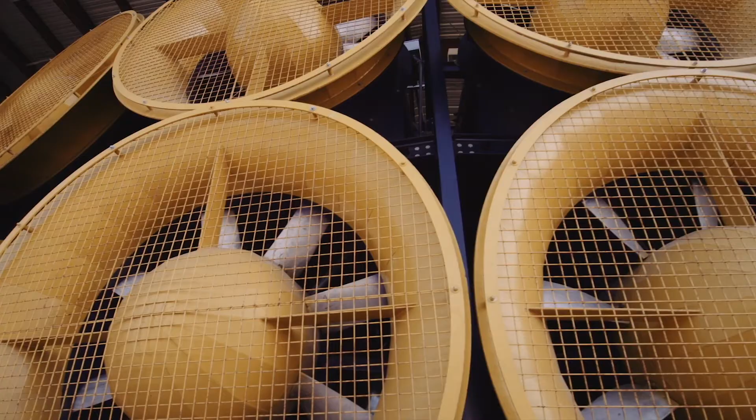The NHERI WOW experimental facility is powered by a combined 12-fan system capable of repeatable testing and up to 157 mile-per-hour wind speeds.

One advantage of the facility is the multi-scale and high Reynolds number simulation using 12 fans and a water spray system, which demonstrates the effects of wind and wind-driven rain.

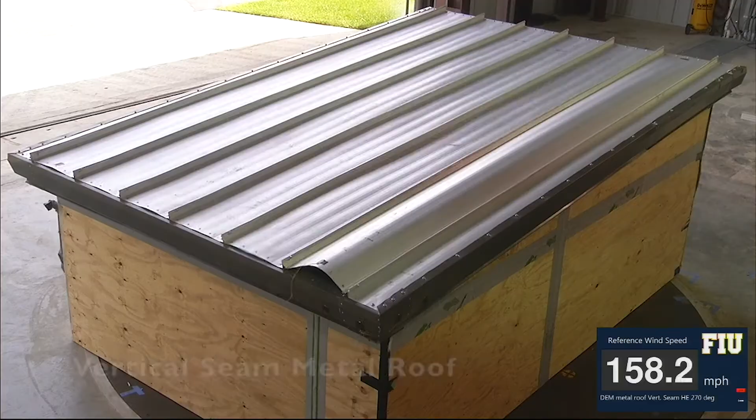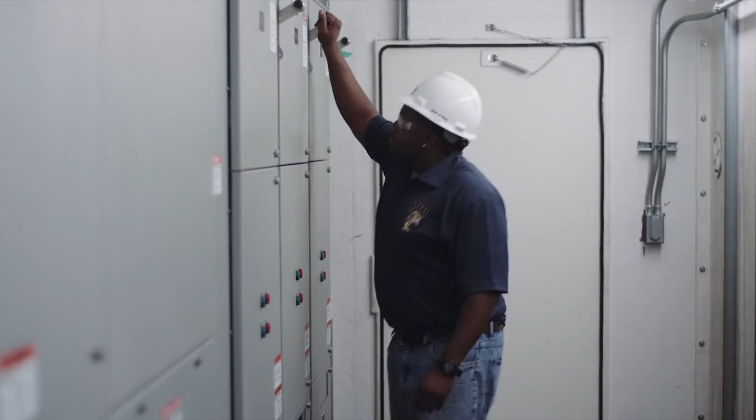The 16,000 square foot fenced-off secure area enables researchers to plan and perform destructive tests for up to Category 5 hurricane wind speeds. Using a wide range of equipment, instrumentation, and experimental simulation protocols, the distinguished group of faculty, staff, and the well-trained team of technical and operations personnel are ready to support your world-class research.

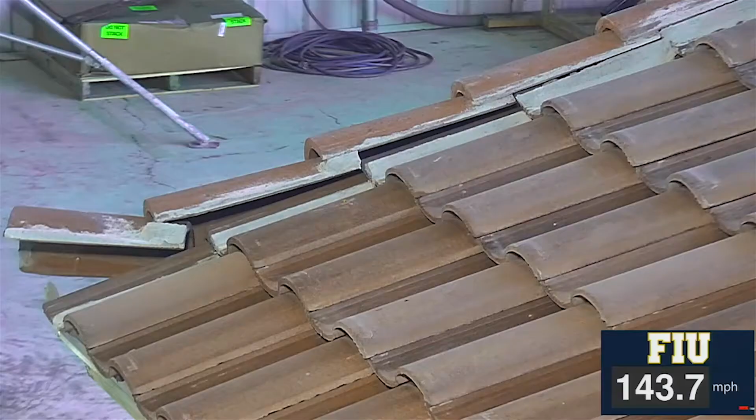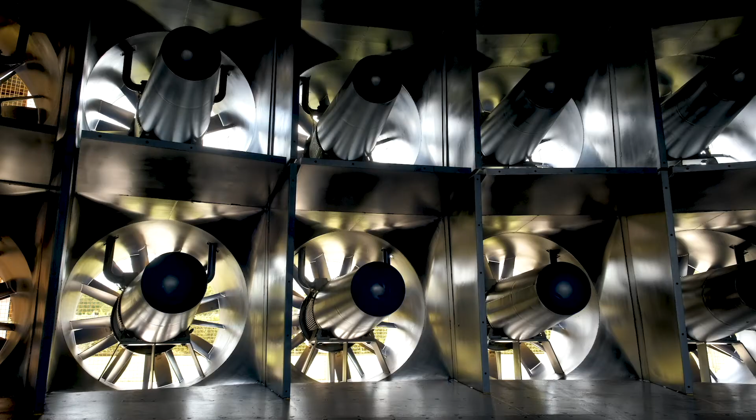The Wall of Wind offers the following testing: high-speed holistic testing with simulated wind speeds, including Category 5 hurricane, destructive tests to study failure modes, wind-driven rain simulation to study water intrusion, full and large-scale aerodynamic aeroelastic testing and atmospheric boundary layer flows, extreme environment testing to develop innovative mitigation devices, and conventional boundary layer wind tunnel testing.

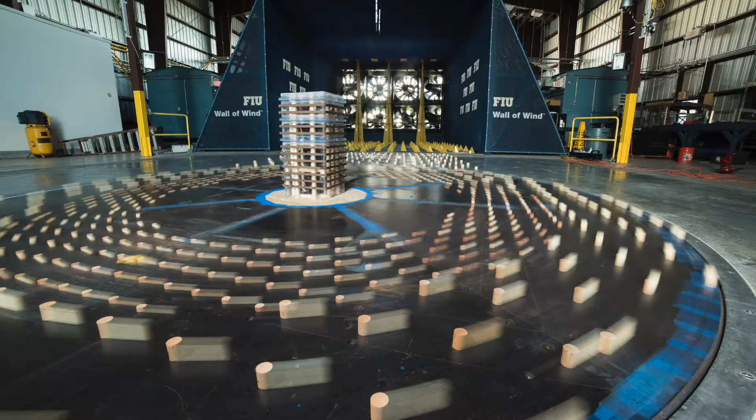If you are interested in learning more about the resources at the NHERI FIU Wall of Wind Experimental Facility and how they can support your research, contact Arindam Chowdhury.

Next, we have the Advanced Technology for Large Structural Systems Engineering Research Center at Lehigh University. Dr. Liang Cao will be here to answer your questions during our breakout sessions.

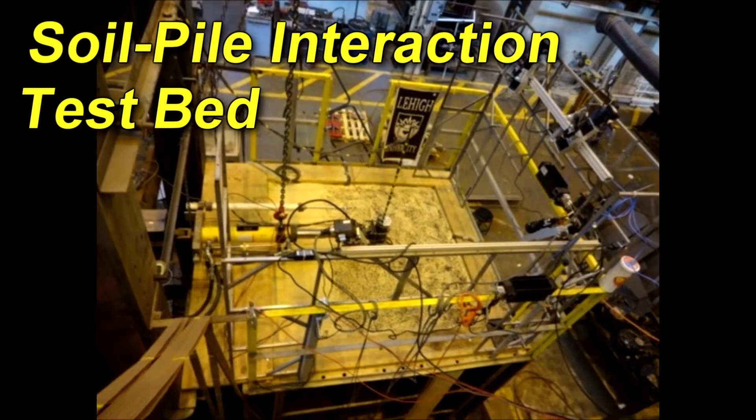Next, we have the OH Hinsdale Wave Research Laboratory at Oregon State University. Dr. Dan Cox is here with us, and he is going to answer your questions if you have any questions about Oregon State University and how they can support your research.

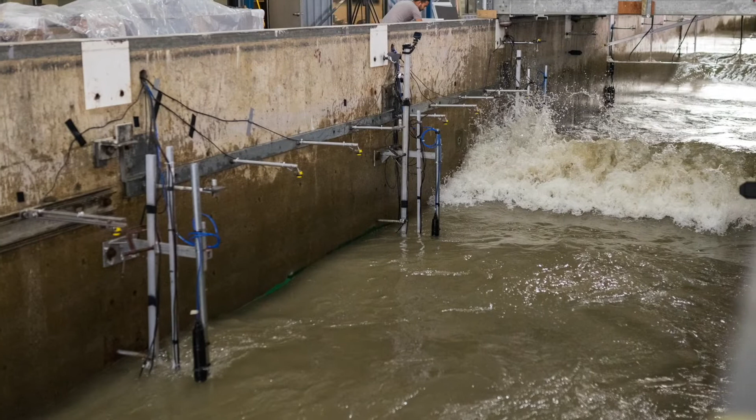The Hinsdale Wave Research Laboratory was established at Oregon State University in 1972 with the construction of the Large Wave Flume. The lab is the largest nearshore experimental facility in the United States.

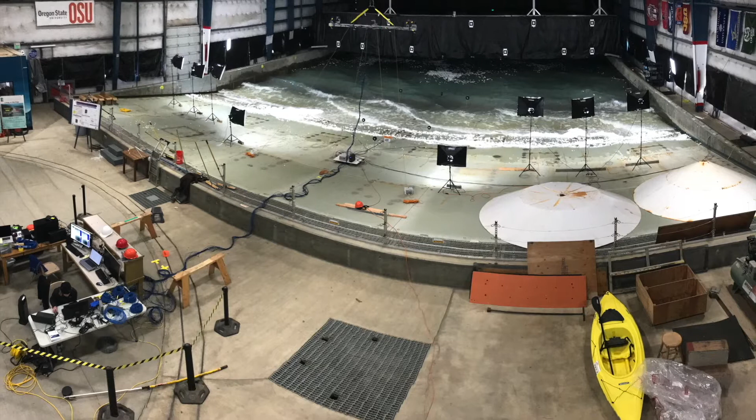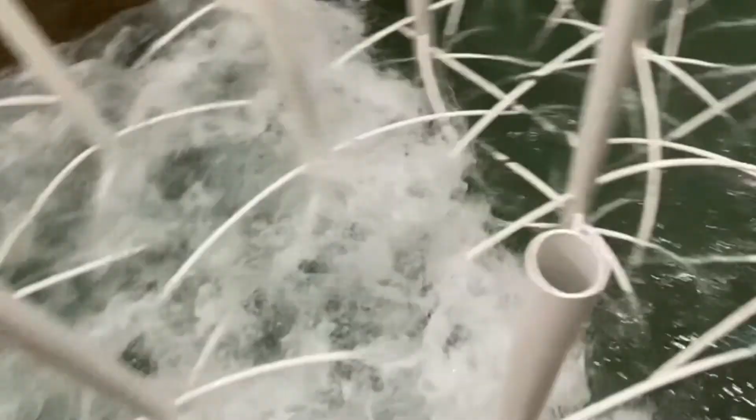Researchers from around the world use the facility to examine the effects of wave, wind, and coastal hazards on a variety of structures and coastal areas. The purpose of the research conducted at Hinsdale is to improve the resilience and sustainability of coastal areas, as well as develop innovative solutions to the design of coastal infrastructure.

The Large Wave Flume and Directional Wave Basin allow for researchers to explore coastal and nearshore processes, such as nearshore hydrodynamics, tsunami research, coastal structures, sediment suspension and transportation, environmental fluid mechanics, and floating structures.

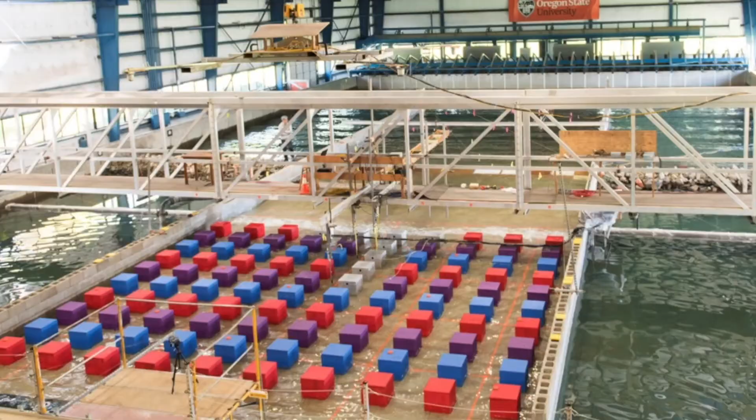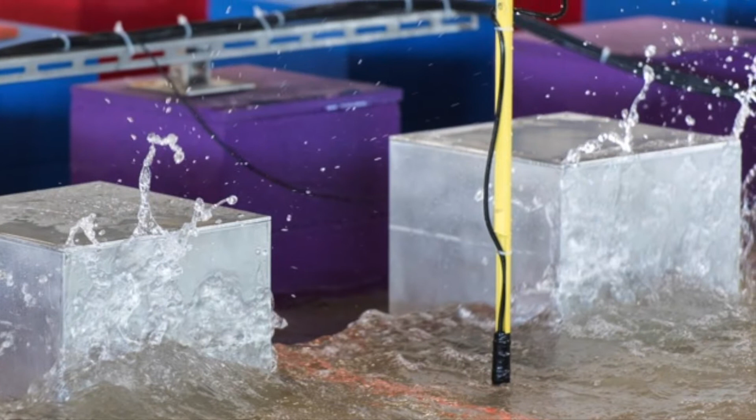This project created new tools to predict structural damage from inundation events along developed shorelines using computer-based predictive methods.

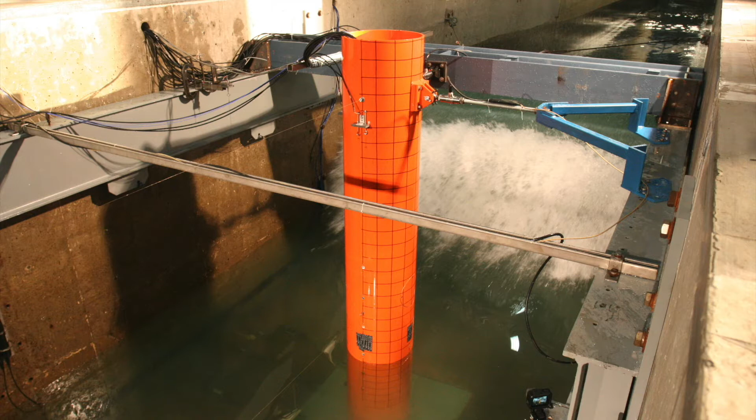Hinsdale also hosted the NSF Career Award Research from Andrew Myers, which focused on advancing multi-hazard assessment and risk-based design to promote offshore wind energy technology.

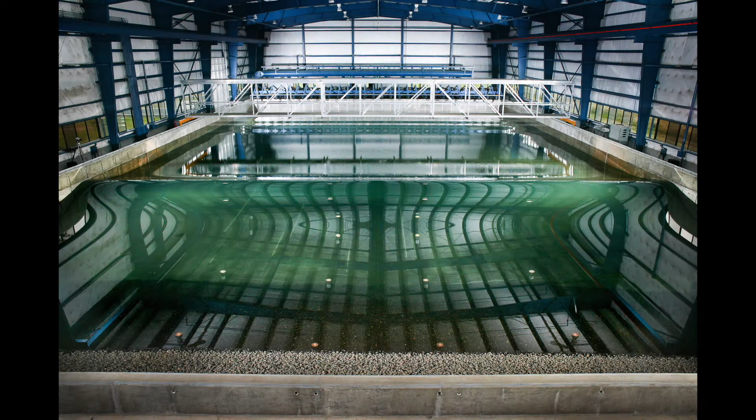If you are interested in learning more about the resources at the Wave Research Lab at OSU, contact Hinsdale at oregonstate.edu.

And next we have the SIM Center at the University of California, Berkeley. Dr. Matt Schoettler will be here, and he will be able to answer your questions about the SIM Center.

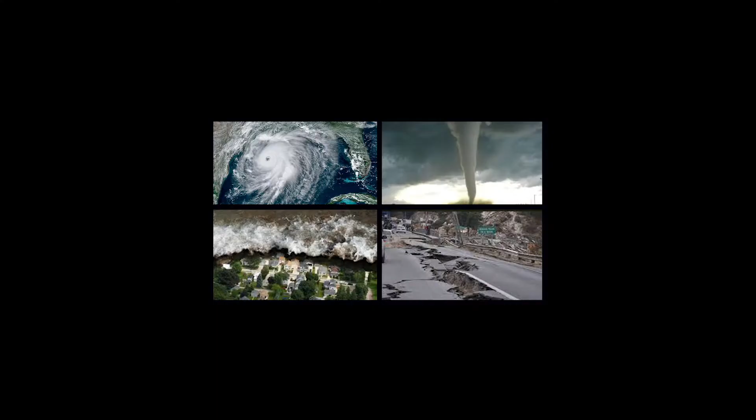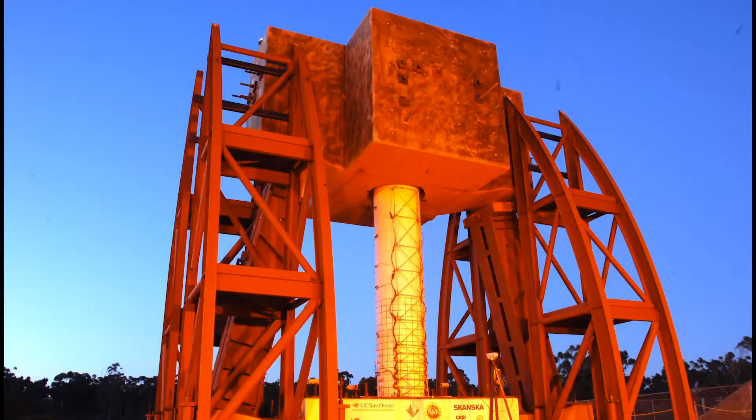Much of the world's population lives in regions susceptible to earthquakes, hurricanes, or other natural hazards, where the risks are compounded by aging buildings and civil infrastructure that often are not designed to resist the hazards. While experiments and field observations are used to understand the impact on communities, computational simulations are an essential component of the science and engineering needed to evaluate and mitigate the potential devastating effects of natural hazards.

To advance these capabilities, the NSF-funded Computational Modeling and Simulation Center, or SIM Center, serves the natural hazards community as an essential and central resource that provides next-generation computational modeling and simulation software tools, user support, and educational materials.

The SIM Center's goal is to advance the nation's capability to simulate the impact of natural hazards on structures, lifelines, and communities. Headquartered at UC Berkeley, the SIM Center relies on a diverse team located throughout the country with expertise in structural and geotechnical engineering, computational fluid dynamics for wind and water, earthquake and wind engineering, performance-based engineering, social science, state-of-the-art computer science, and software development.

The SIM Center addresses these diverse hazards and disciplines by producing flexible and reconfigurable software applications that researchers and practitioners can use to better understand the effects of natural hazards on the built environment.

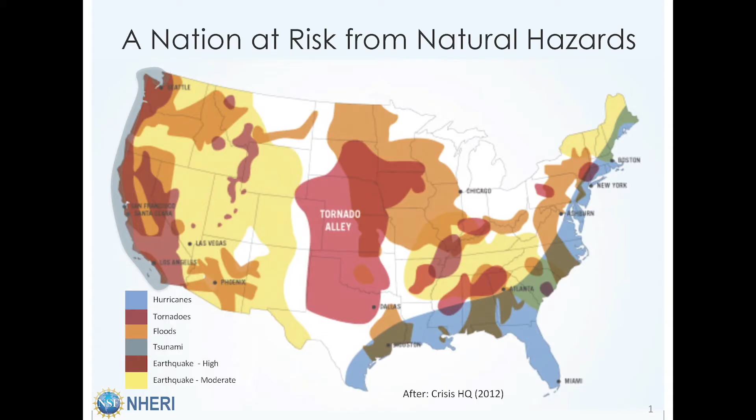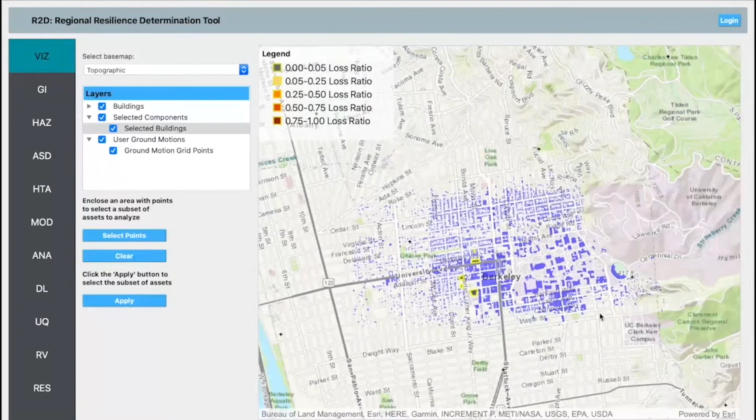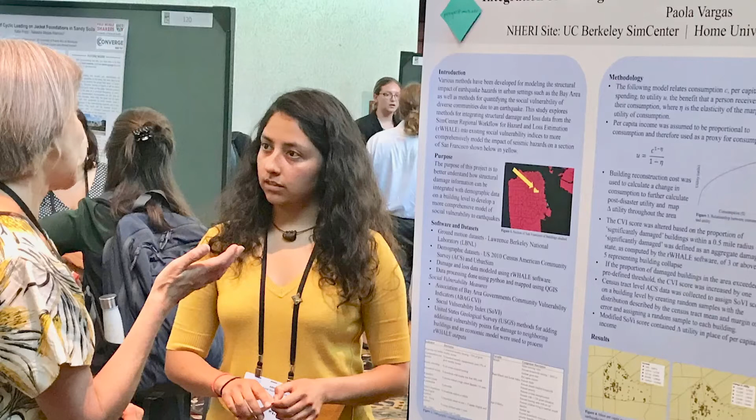These applications enable the SIM Center to achieve these goals: 1. Provide tools to interface with outputs from the hazards science community. 2. Advance local-scale computational modeling of buildings and infrastructure subjected to natural hazards. 3. Facilitate regional-scale risk simulation with multi-fidelity, high-resolution models and data. 4. Develop tools for integration with social science and urban planning models. And 5. Engage and educate the natural hazards engineering community to advance simulation methodologies and their use.

Emerging researchers are trained through workshops, webinars, and programming boot camps. The state of the art in computational simulation is published in a recent report, which includes how tools developed by the SIM Center incorporate advanced simulation methods, uncertainty quantification, cutting-edge artificial intelligence techniques, and high-performance computing. The report outlines how the research community can leverage these tools to advance research in various areas of natural hazards engineering.

Through its emphasis on multi-hazard and multidisciplinary approaches, the SIM Center benefits the broad natural hazards engineering community. We foresee that policymakers worldwide will be able to rely on researchers' integrated simulations to make vital decisions to mitigate the social and physical damage from natural disasters, thus creating more resilient communities.

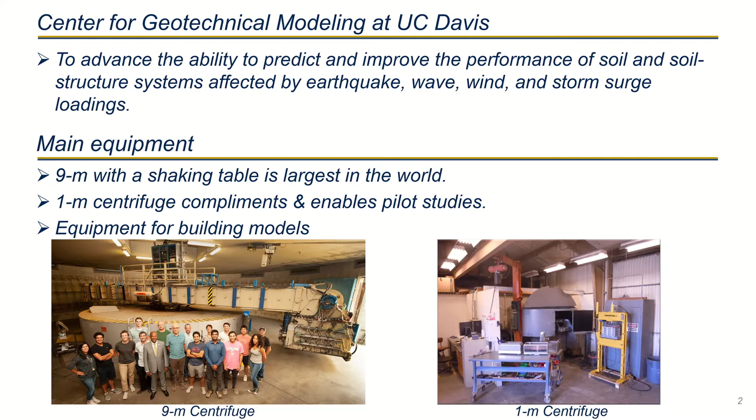This is done by scaling the stress in a model specimen using the radial G-field produced by a centrifuge. The main equipment at the facility consists of a 9-meter centrifuge, shown in the lower left, which has the largest shake table in the world, and a 1-meter centrifuge, shown in the lower right, which can be used for pilot studies. Both centrifuges are supported by a large and diverse set of equipment that can be used to build models.

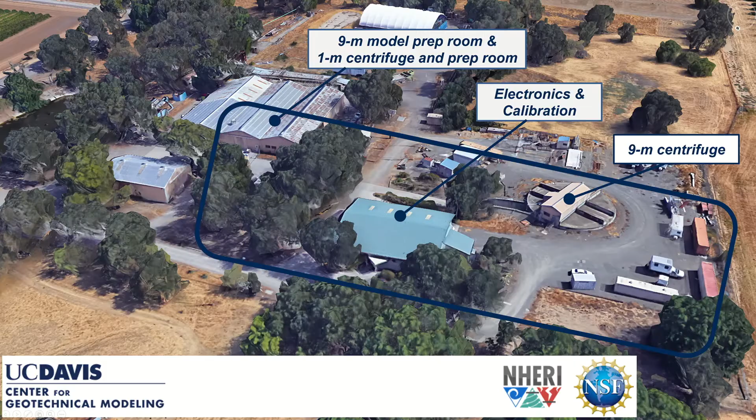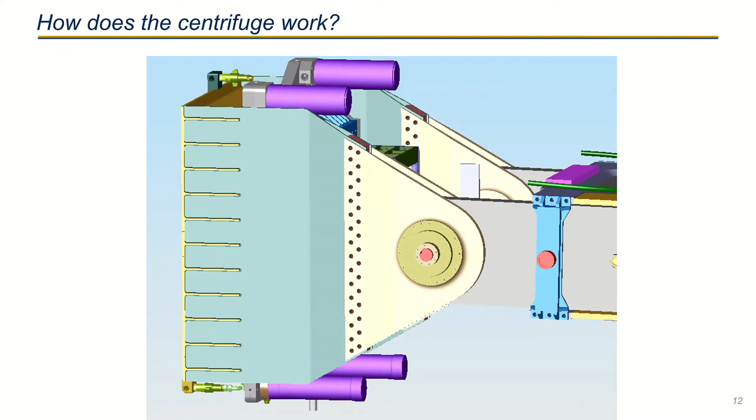For those of you who have not seen how a centrifuge operates, here is a sketch of the 9-meter centrifuge. The centrifuge rotates around this spindle, shown here in the center. As you rotate faster and faster, the bucket starts to tilt up, and when you get to 75 Gs, the bucket is near vertical. The G-field produces a normal stress on your model, and an actuator located down here at the base can simulate shaking of the model and any structures that you may have on top of the model.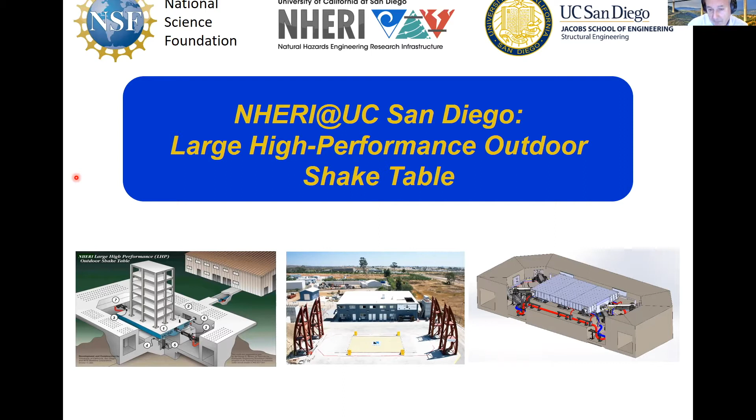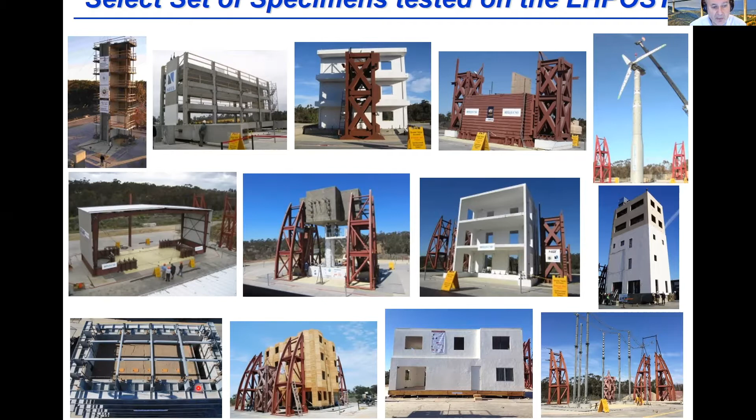Finally, here we have the NHERI at UC San Diego team, consisting of a number of faculty members with expertise in various aspects of earthquake engineering, with 20 years experience in running this facility.

We also have very talented research and development engineers and technicians ready to help you plan, design, and conduct your future experiments. We can be contacted at this general email here, and more information can be obtained on our website at the Design Safe. Thank you very much for your attention.

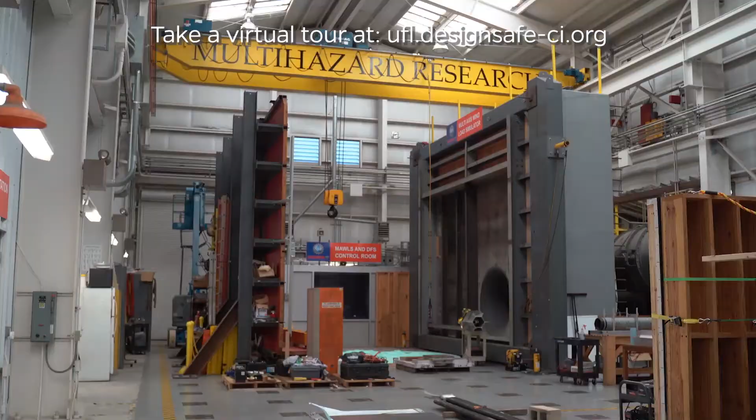The University of Florida proudly hosts a shared-use NHERI experimental facility that enables transformative wind hazard research. Our globally unique boundary layer wind tunnel is located within the 20,000 square foot Powell Family Structures and Materials Laboratory.

The UF NHERI PIs and staff help guide researchers through the process of vetting project ideas, writing proposals, conducting experiments, and identifying outreach opportunities. The wind tunnel simulates atmospheric flow conditions at a reduced geometric scale.

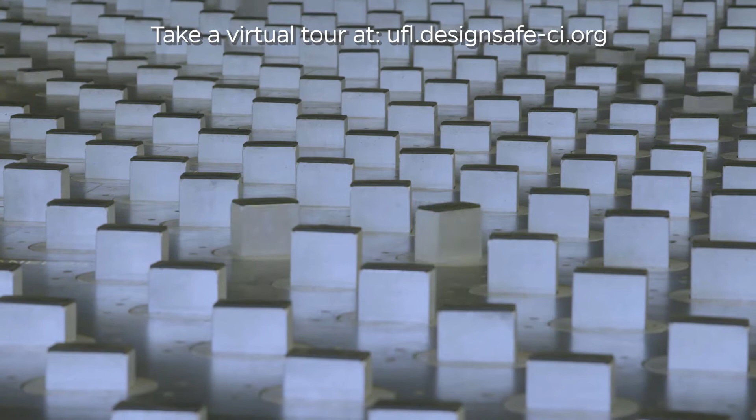We have developed several features that dramatically increase experimental throughput. The Terraformer is a unique system that controls the height and aspect ratio of more than 1,100 individual roughness elements, providing unprecedented granularity in the control and tuning of approach flow. In less than 90 seconds, the roughness configuration can be changed to alter the boundary layer profile and geometric scale.

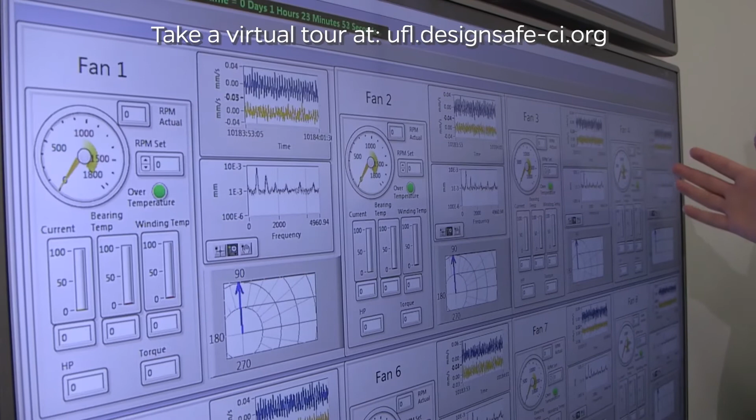A suite of instrumentation is available to monitor flow velocity and test subject pressure, base reactions, and motions. Turbulent flow is measured using Cobra probes mounted on a 3 degree of freedom instrumentation gantry that can traverse nearly the entire length, width, and height of the wind tunnel.

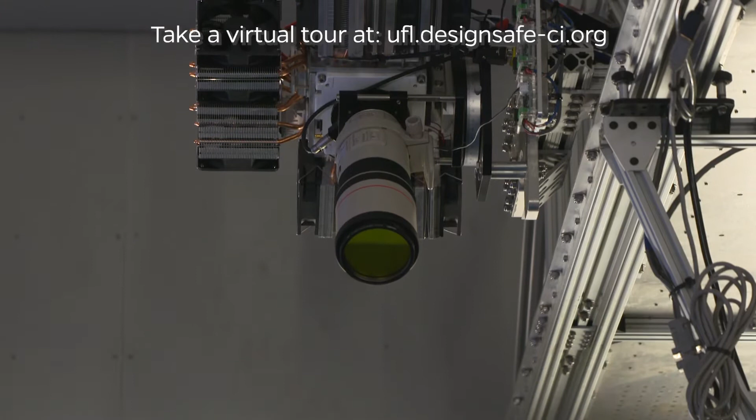The gantry is also fitted with a stereoscopic particle image velocimetry system, or PIV. Its high-energy laser illuminates particles that are dispersed into the flow, while 2 high-speed cameras capture the particle motion to produce 3-dimensional, time-resolved flow field measurements.

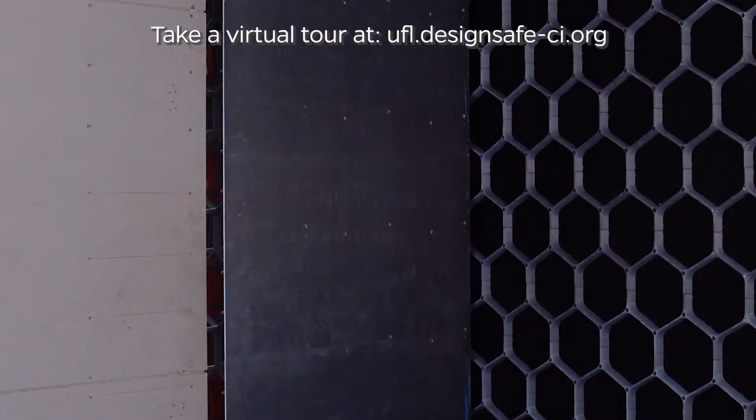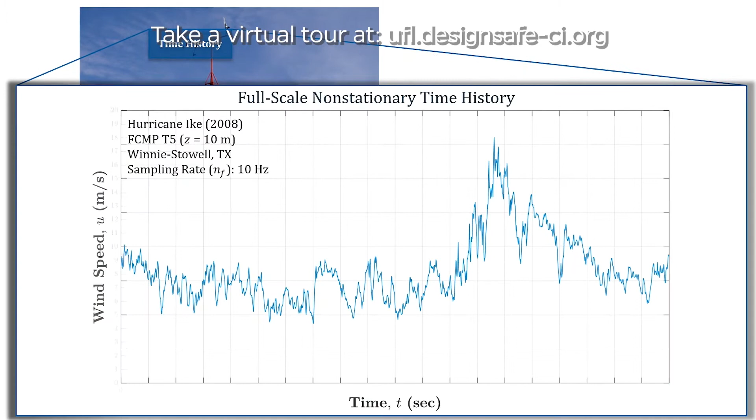The simulation of non-neutral and non-stationary flow is achieved by our flow field modulator, or FFM. The FFM slides into the wind tunnel on a track system upwind of the terraformer. This array of over 300 individually controlled fans can produce non-monotonic flow profiles and impart transient gusts characteristic of field-measured extreme wind events, enabling new investigations in wind structure interaction not possible in a traditional boundary layer wind tunnel.

Please contact us to initiate your wind hazard research. We're looking forward to hosting your NSF projects in our NHERI experimental facility.

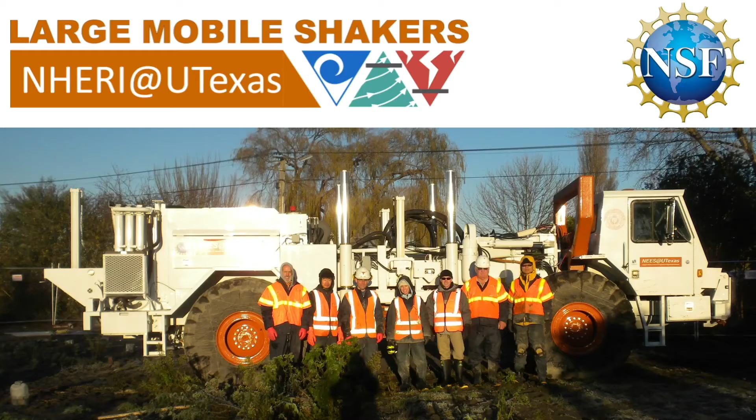The NHERI at UTexas Large Mobile Shaker Facility is located at the University of Texas at Austin. We are home to 5 large mobile shakers and associated instrumentation, including data acquisition systems, geophones, 3-component broadband seismometers, a fiber optic distributed acoustic sensing interrogator, 3-component nodal seismic stations, and cone penetration testing equipment.

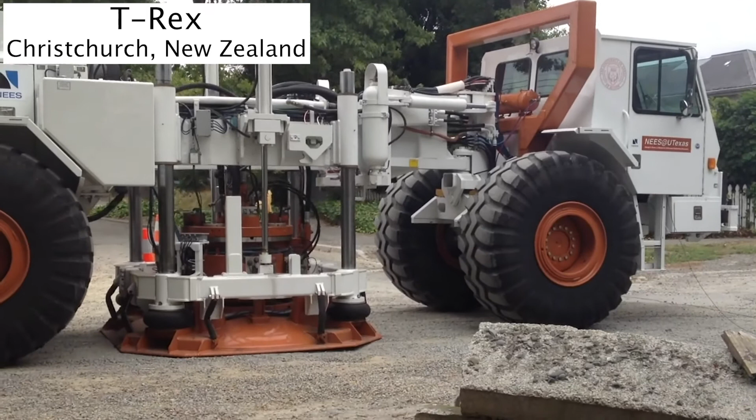While our equipment is stored in Austin, Texas, our mobile shakers can be taken anywhere in the world to conduct in situ dynamic testing of civil infrastructure and natural geologic systems. These in situ testing capabilities are essential for evaluating existing infrastructure in actual field conditions that are difficult or impossible to replicate in a laboratory.

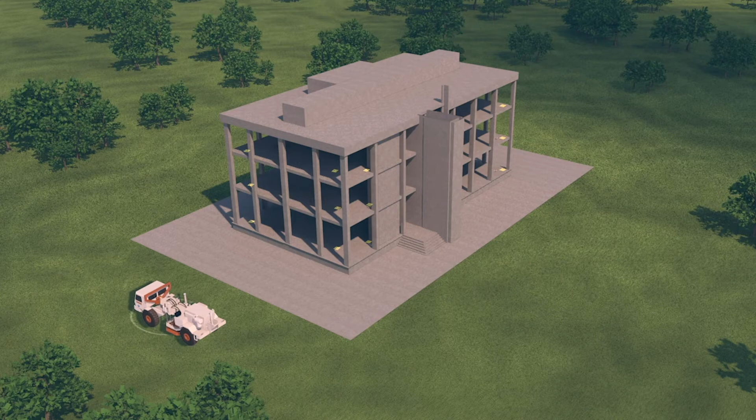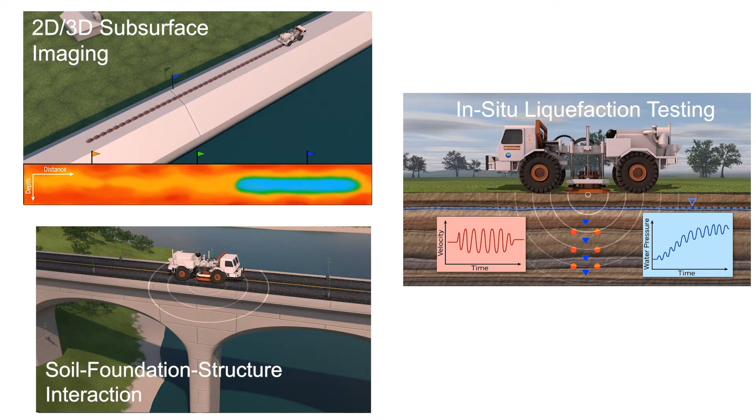The NHERI at UTexas Science Plan revolves around 3 main research thrusts. First, non-invasive subsurface imaging from 1D to 3D. Second, in situ liquefaction and nonlinear testing of soils. And third, soil foundation structure interaction and structural health monitoring studies.

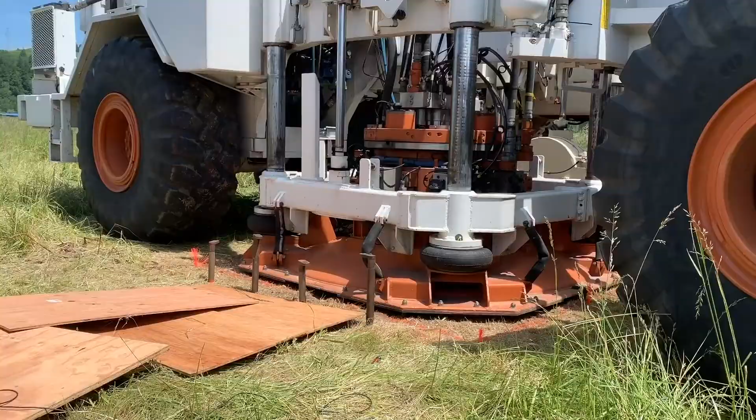Some example projects include in situ nonlinear testing of bioremediated soils engineered to reduce liquefaction potential. Here, the T-Rex and Rattler large shakers were paired together to induce higher levels of shear strain deeper in the soil at a site near Portland, Oregon.

Here, the triaxial T-Rex shaker was used to non-destructively test a bridge in New Jersey to characterize soil foundation structure interaction under large amplitude shaking.

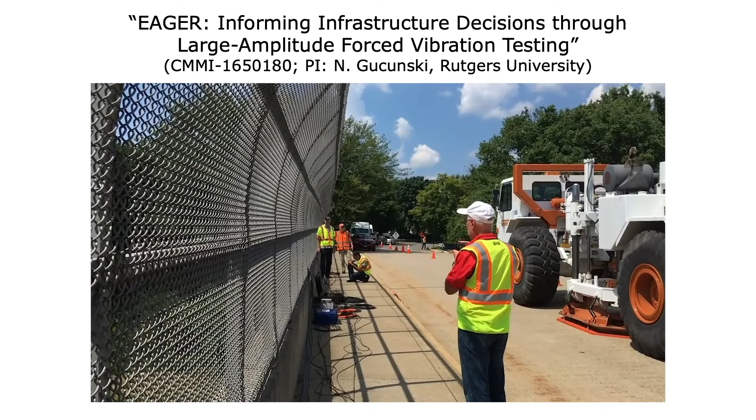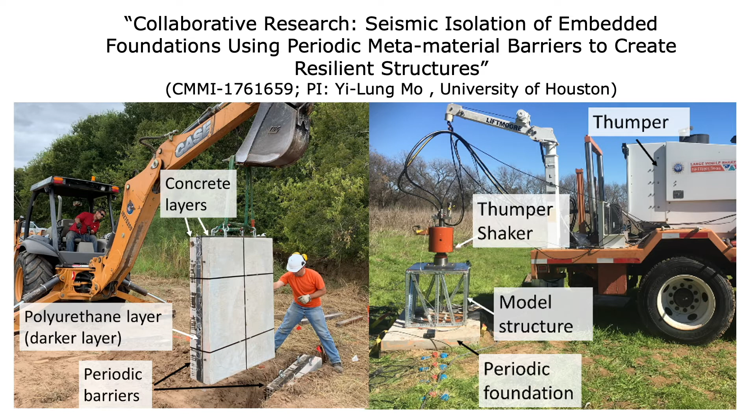In another project, the shaker from our smallest truck was removed and mounted on a scale building model to simulate dynamic loading on a structure atop a newly developed seismic isolator. For more details on our equipment and videos from past workshops, please visit our website at

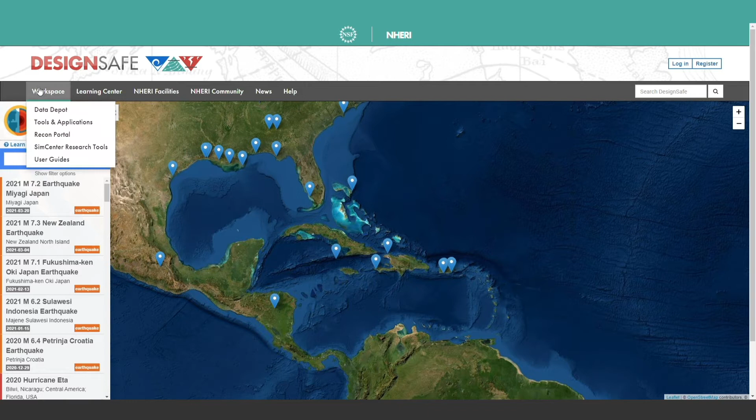The DesignSafe Reconnaissance Portal uses a map interface to provide easy access to data collected to investigate the effects of natural hazards. And the DesignSafe Workspace provides cloud-based tools for simulation, data analytics, and visualization, as well as access to high-performance computing. There are many examples of how DesignSafe data and tools are being used to enhance our understanding of the effects of natural hazards on the built environment.

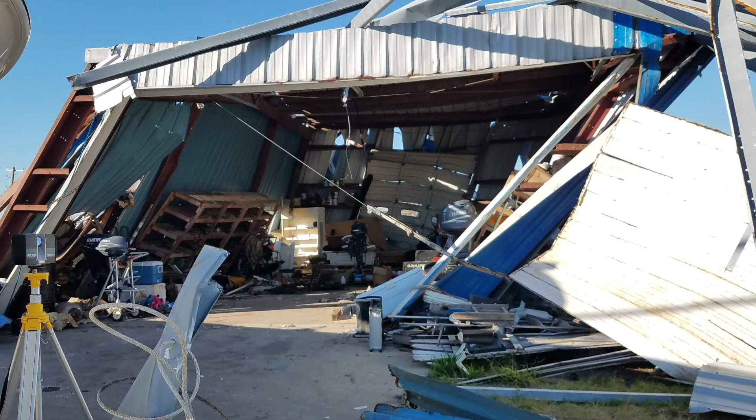Detailed data and images of damaged buildings have been collected by many groups of researchers after events such as Hurricanes Harvey and Michael. These data have been published on Design Safe and are being used by the broader engineering community to better understand hurricane impact and to use artificial intelligence to better predict potential hurricane damage.

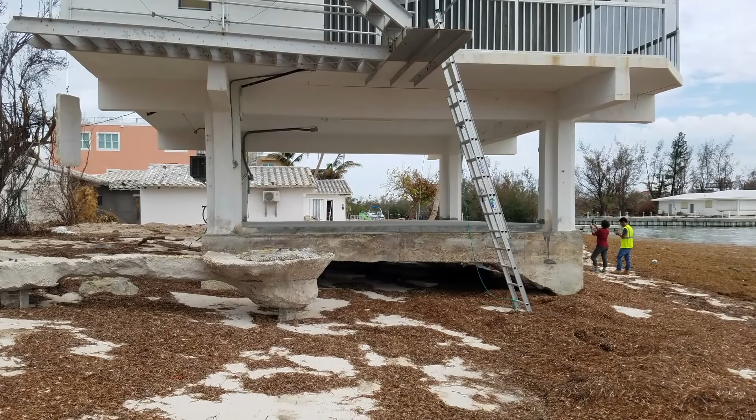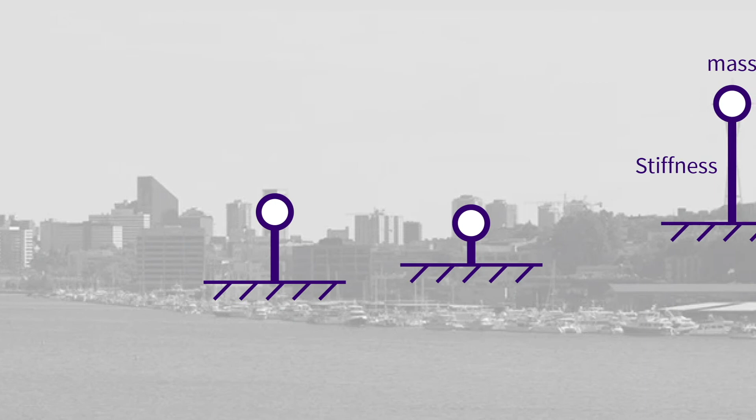To better understand the impact of a magnitude 9 earthquake on the city of Seattle, researchers at the University of Washington and the U.S. Geological Survey used Design Safe computing resources to perform regional ground shaking simulations. These simulations incorporate the unique deep sediment structure in Seattle, which affects the characteristics of shaking and can be particularly damaging to tall buildings. The results from these simulations are available via Design Safe and are being used in the design of high-rise buildings in the region.

These are just a few examples of how the capabilities of Design Safe are enhancing natural hazards research and becoming an integral part of research discovery. Learn more or join our community at

designsafe-ci.org. Last but certainly not least, the Rapid Response Research Facility, Dr. Joseph Wartman, is supposed to be here to answer your questions from the University of Washington.

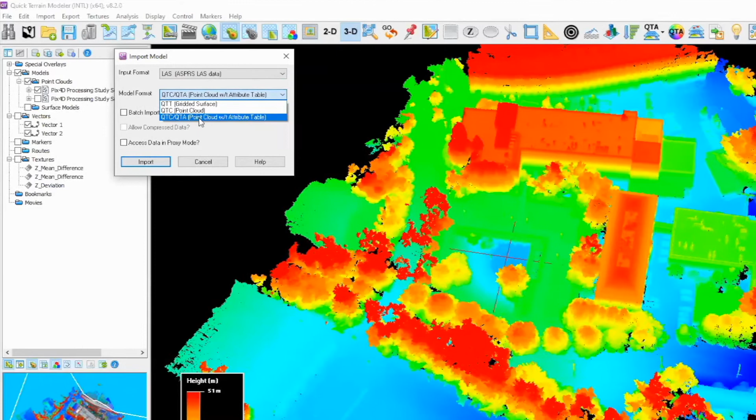The University of Washington in Seattle hosts the NHERI Rapid Natural Hazard Reconnaissance Facility. The mission of the facility is to provide investigators with the equipment, software, and support services needed to collect, process, and analyze perishable data from natural hazard events. The facility emphasizes three-dimensional, image-based, advanced survey data to serve a range of disciplines.

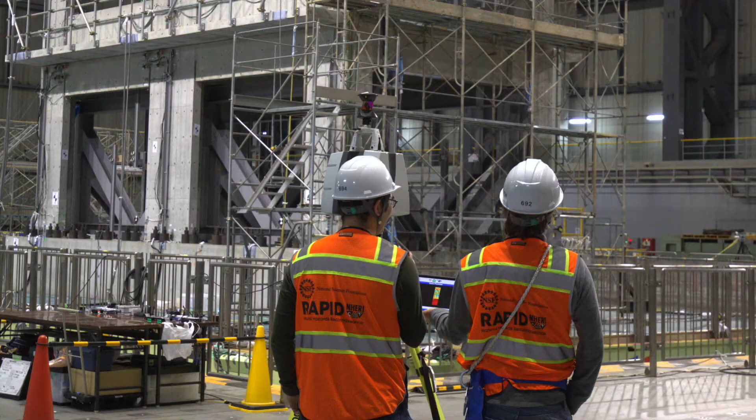Some of our most requested equipment includes tripod-mounted terrestrial LiDAR systems capable of scanning ranges up to 2.4 kilometers for landscape-scale mapping, as well as smaller and extremely portable systems with a 130-meter range. The unmanned aerial Phoenix Mini Ranger LiDAR system, customized to meet the needs of the rapid and natural hazard reconnaissance community. Two street view camera systems with car and backpack mounts for post-disaster image capture, and a two-meter-long autonomous survey boat for collecting bathymetric data.

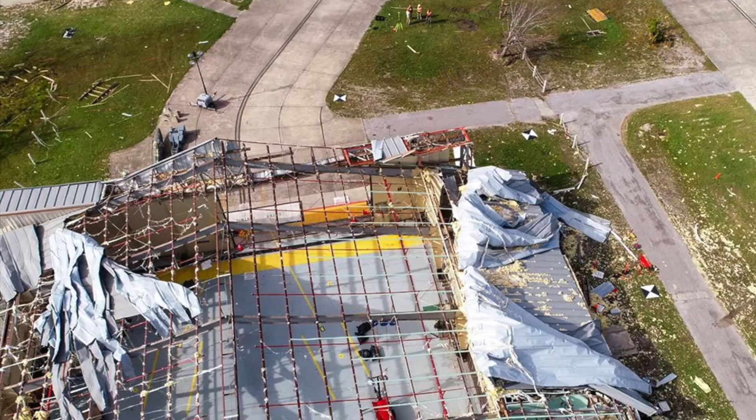In addition to instrumentation, Rapid also provides reconnaissance advisory services and basic logistics support for field investigations. We respond globally to disasters and to field data gathering projects across the world, so we can help you get your equipment where it needs to go.

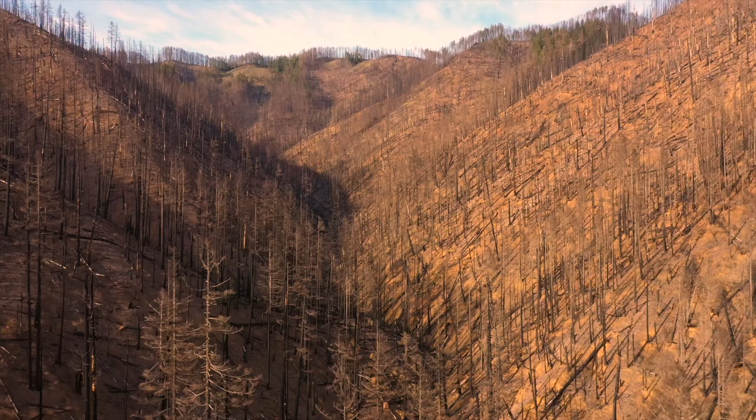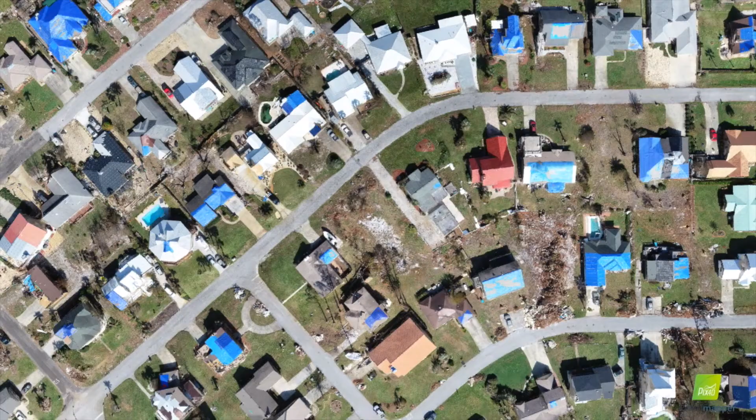You can find more information about the equipment portfolio, software, and services on our website at rapid.designsafe-ci.org. We are committed to reconnaissance-based science, shared resources, open data, interdisciplinary research, community engagement, and innovation to reduce the adverse impacts of natural hazards.

Please don't hesitate to contact us if you have any questions about the facility or about what we can do to help your NSF project.

Does anyone have any questions for any of the sites? How you can use their resources, how you can contact them, specific examples of research that has been conducted at their sites? Did you have a question? Because I can see you now. I did, yeah. Go for it.

I was going to type it, and then I thought, well, maybe since no one's talking, I'll go ahead and just ask it. This is for the Data Depot. In the video, damage information for buildings was mentioned. Is there the capability of having damage information for other types of damage, say to infrastructure, for example? Or like non-structural, I guess, and then what type of building damage? What types of damage information are supported?

Right, so I guess I'll take this one. Tim Cockerill at University of Texas Advanced Computing Center, and also the DesignSafe Deputy Project Director. So we really have a fairly open architecture with respect to that. We don't restrict any file types or any kind of thing, so any data you want to bring to the table is fine. Different research groups, we need to support all the different types of activity going on, whether it's data from experimental facilities or, as you're talking about, reconnaissance data, typically.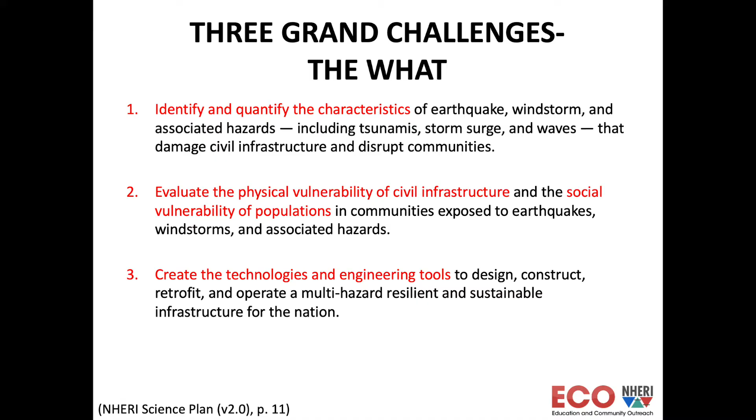So these grand challenges are what I call the 'what' - what should we be looking at, what are some things that are at the forefront of natural hazards research that will be transformative and making an impact?

And that leads us to the 5 key research questions, which I like to call the 'how.' How are we going to create research that is transformative, that addresses those grand challenges, and that not only influences our academic community, but impacts society at large.

So there are 5 key research questions. 3 of them are on this slide, and 2 more are on the other slide.

We would like you to select one of these research questions to focus on. We can work on beginning an outline of a collaborative proposal based on this question.

The first question is: how do researchers characterize the transient and variable nature of the loading actions imposed on the nation's civil infrastructure from earthquakes, windstorms, and associated hazards?

The second question is: how can the scientific community enable robust simulation of the behavior of civil infrastructure to loading from earthquakes, windstorms, tsunamis, and associated coastal hazards, while also considering the effects of these hazards on individuals, households, and communities?

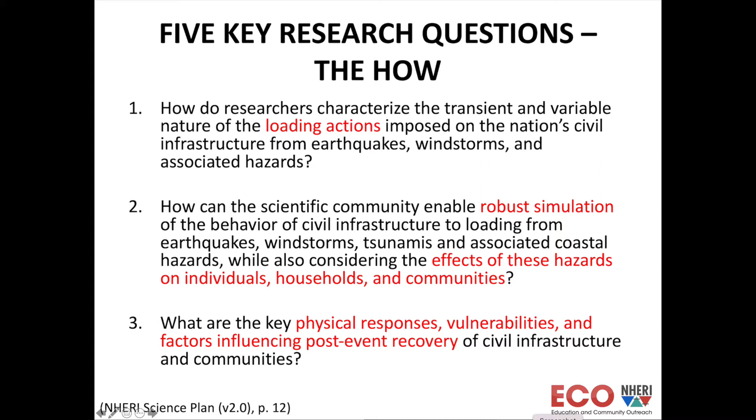The fourth question: what are effective and potentially transformative mitigation actions to achieve community resilience, especially when considering different hazards, shifting vulnerabilities, emerging technologies, and sustainability goals?

And the final key question: how can the scientific community more effectively collect and share data and information to enable and foster ethical, collaborative, and transformative research and outcomes?

So we have the key challenges, which present the different topics that are really relevant and transformative, and then we have the key research questions, which dig down a little deeper and point more specifically to areas that need attention.

How else do the grand challenges and key research questions help facilitate research? How have you seen it happen?

Karina, I know that we have used the 5 key research questions in the past. Has it been a good jumping off point for researchers to utilize NHERI resources?

So the science plan is usually presented at the Summer Institute for Early Career Faculty, and this is where it is discussed in greater detail.

Some of the questions have also been edited due to participation from the community, to incorporate more of the holistic research agenda. Researchers are trying to see where their research fits into one of these questions, if not multiple. All of the NHERI research sites can help with research that addresses any of these 5 questions, so you might have to look for how your research fits into the larger research agenda, and this science plan is one way to do that.